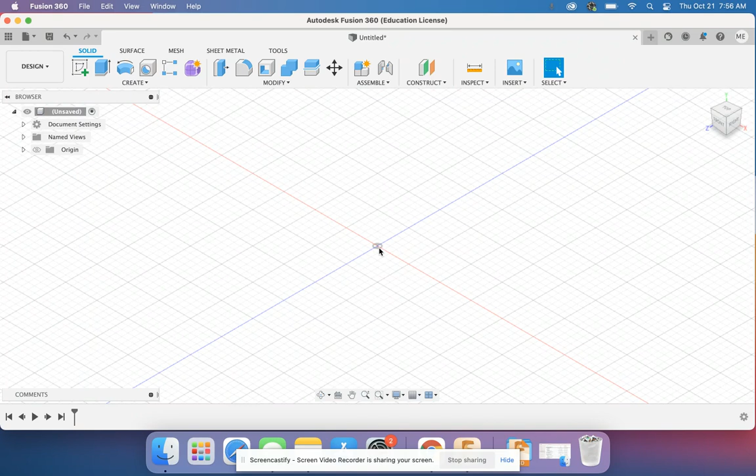Now that we're started, I want to construct the box so that it is around the central origin point. But in order to do that, if I turn on my origin, there's no plane that sits out here so I can revolve something around the origin. So I'm going to need to construct an offset plane.

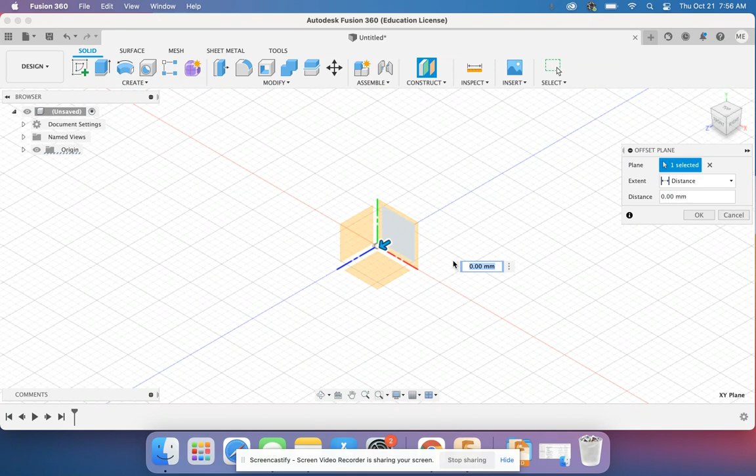I'm going to construct that offset plane from this, and do it as length divided by 2. Now I have a plane that's halfway off of the origin in this direction, so as I revolve, everything will center on the origin. Now I can create a sketch on that plane.

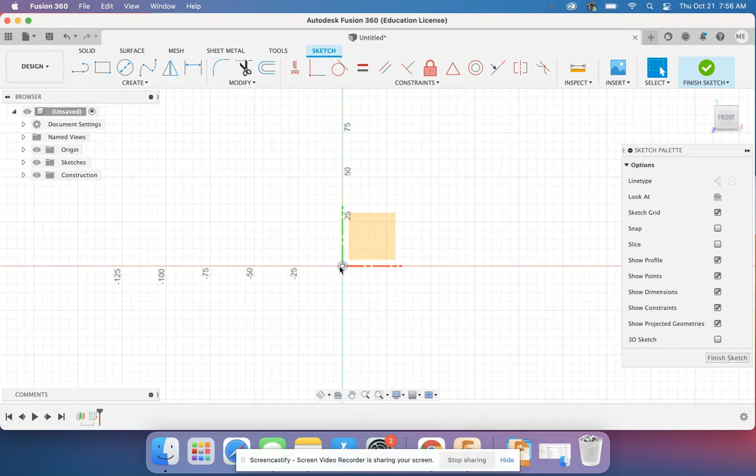My origin here is at the center, and I want to center the box on that origin on this plane, so I'm going to use a center rectangle. This box is going to be length times millimeters, by length.

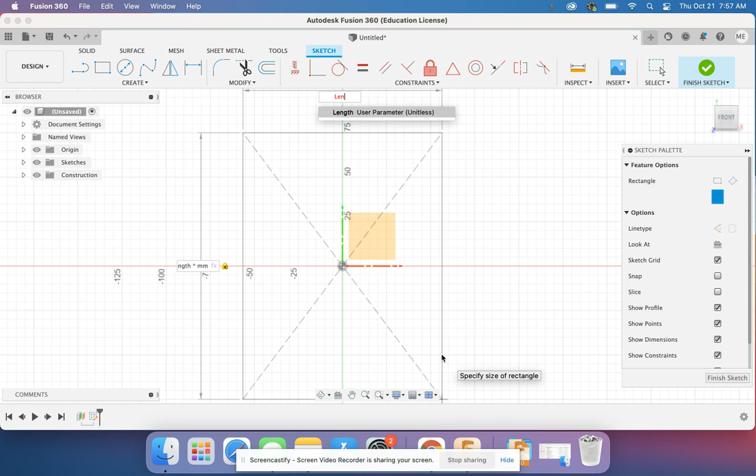So I have the first wall of my box as a sketch, and this is actually the only thing I want to do in this sketch. So I'm going to go ahead and finish my sketch now.

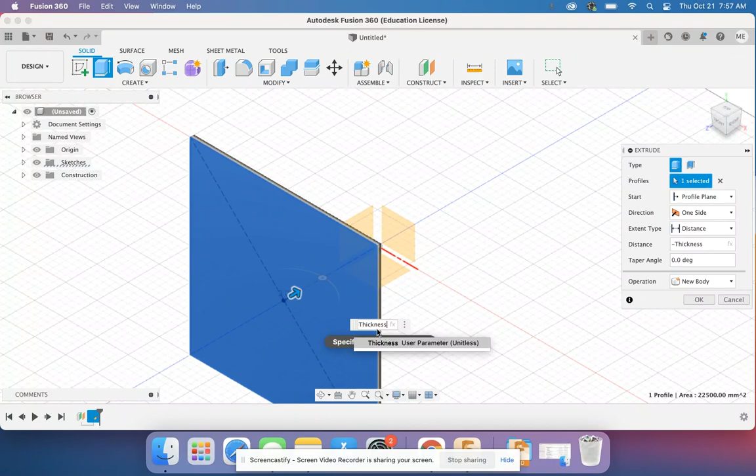I want to extrude my first wall in, and I'm going to do this by negative thickness. I want all of the plates of the box to be pushed inward so that they intersect. So there's my first body.

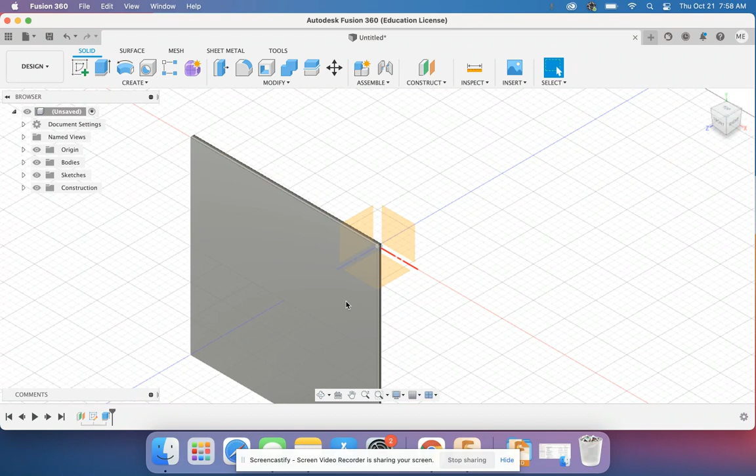But we will be doing quite a few different types of joints, and some of them are more complex and require some ability to move around. So we are going to create a rectangular pattern on this so we can create 3 levels of this wall. This wall will have 3 panels all stacked together.

So I'm going to click the rectangular pattern tool. I'm going to choose bodies, and then select my object. I'm now going to select the direction that I want to go.

To do this, I'm going to orbit slightly. Now I'm going to select the direction, and I want a direction in this fashion. I'm going to make this at negative thickness times 2, so now you can see the 3 panels lined up.

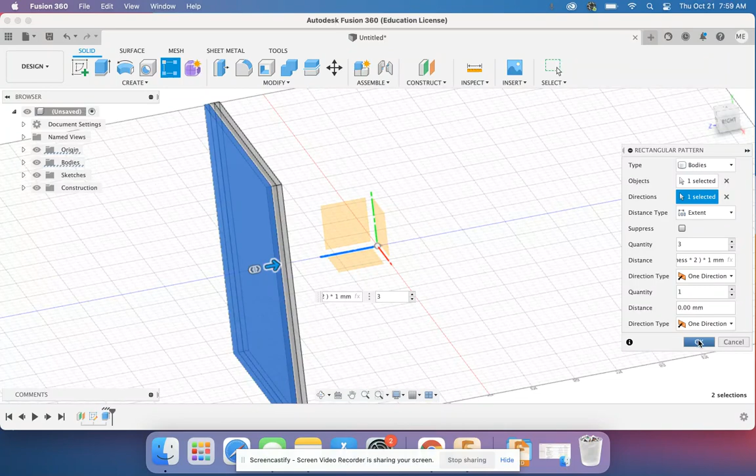Before you click OK, though, we don't want any pattern or repeat in the other direction. So we're going to put 1 there, so it only makes 1, and there's not 6 panels sitting on top of each other, or 9 panels. Instead, we just want 3 stacked panels. So we'll go ahead and hit OK.

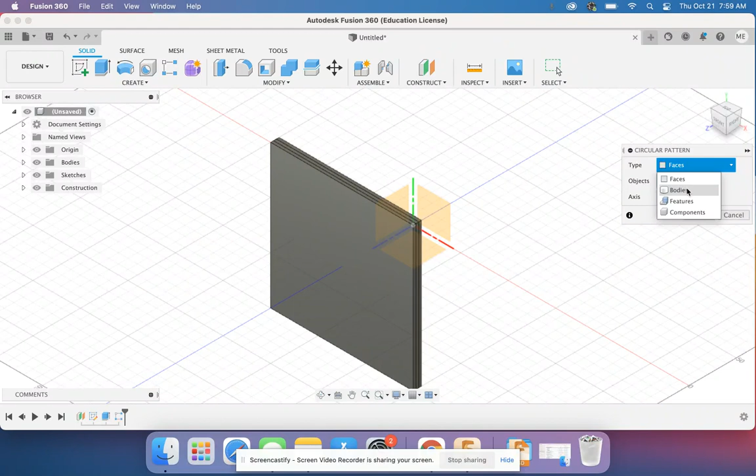And now we have the first panel or side of our box. A cube, or a box, has more than one side, so we can use the pattern tool, the circular pattern tool this time, to take these bodies and rotate them around the center axis.

I'm having a little trouble selecting all the bodies, so I'm going to go into my bodies menu and select them that way. Now the axis we want to rotate them around is the center axis.

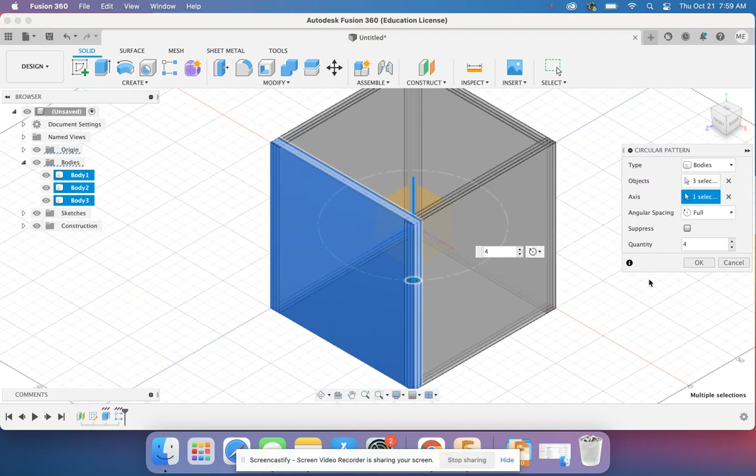Quantity-wise, our box is going to have 4 sides, and that's all we're doing. Okay, so you can see we have 4 sides, but we don't have a top or a bottom.

So we're going to look at 2 tools, one we've used before, one we haven't, to create the top and bottom. First off, I'm going to click on the Move and Copy tool, which allows us to manipulate these bodies, and we can create a copy.

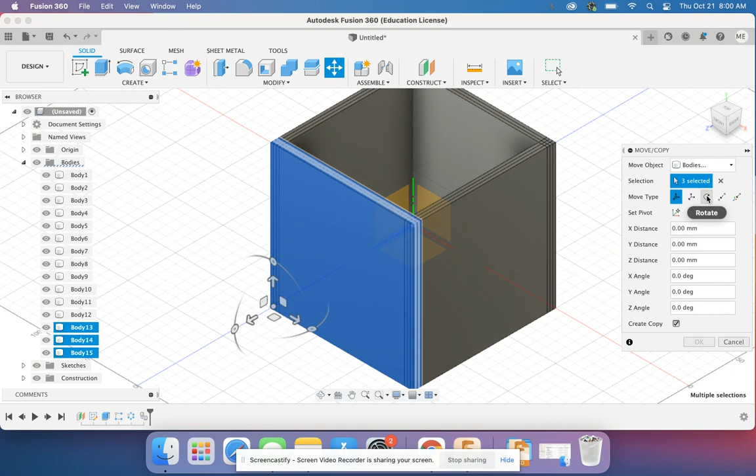So we're going to check that. But we don't want to just move this translationally, we want to actually rotate it so it's at the top. So when I do that, I have to once again click Create Copy.

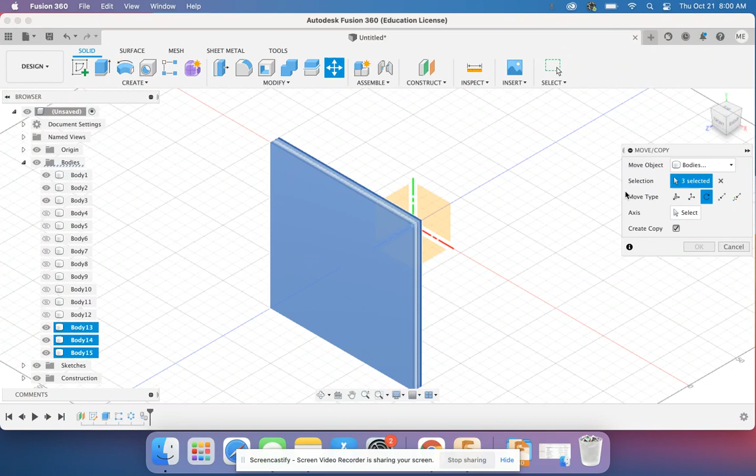A lot of these bodies are kind of in my way, so I'm going to turn them off so I can see the origin better and select the axis I want to rotate around. I want to rotate around this axis, and I'm going to rotate it 90 degrees.

Now I've created the bottom of my box. I can hit OK. Just so I can see this better, let's go ahead and turn those bodies back on. And you can see it lines up perfectly as the bottom of the box.

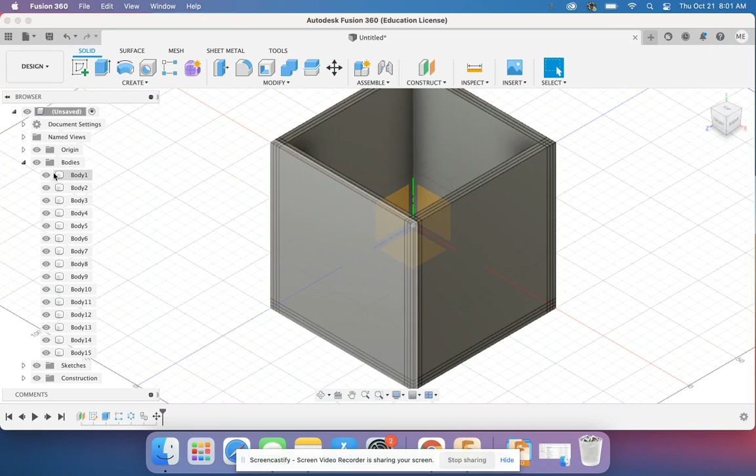So we're going to turn off those front 3 bodies, that way we can see once again inside of our box well. And we are going to select the last 3 bodies now and mirror them.

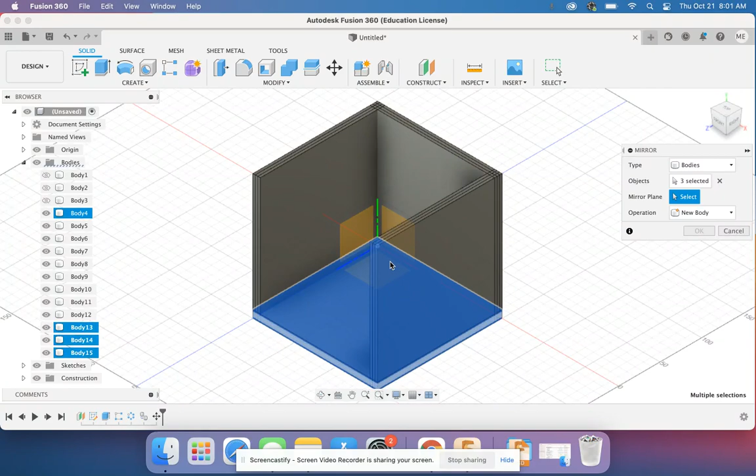So create a mirror, and select these 3 bodies. Then the mirror plane is going to be simply the origin plane that we originally have. So here, this X plane will be what we mirror across.

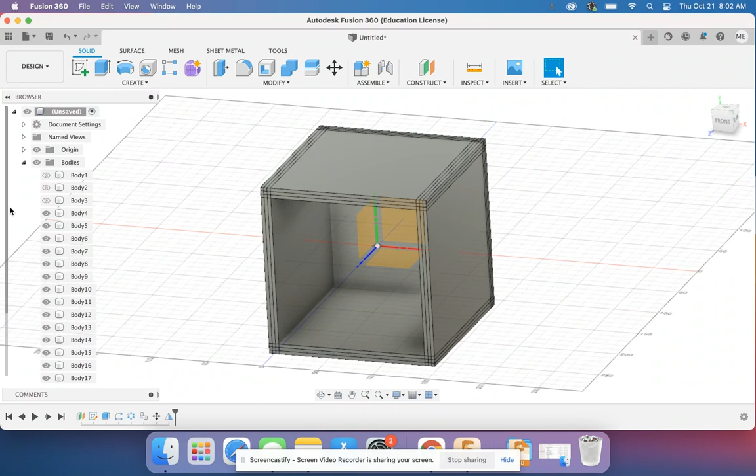Okay, and we're creating new bodies. And now, if we turn it all on, we have a full set cube.

So one more thing before we go. I'm going to take body 1 and make it a component, create components from bodies. That was the front plate. I do it in this fashion because I'm going to go label this as front.

And now I can select other bodies to also move to the front. So I can select this one, drag it down, put it in the front. And lastly, body 3. I do this because if you look, this gets a little bit more confusing, that 4, 5, and 6 are actually on different faces of the body.

Okay, so let's go ahead and take body 4 and create a component. It is on the right side of the box. You can use this as reference up in the top corner. So I'm going to call this one right.

And then I'm going to find all the other right panels and put them in the same component. This way, as we start working, we'll have bodies grouped and be able to work with them. So I'm going to go ahead and do this for all other sides: back, left, top, and bottom.

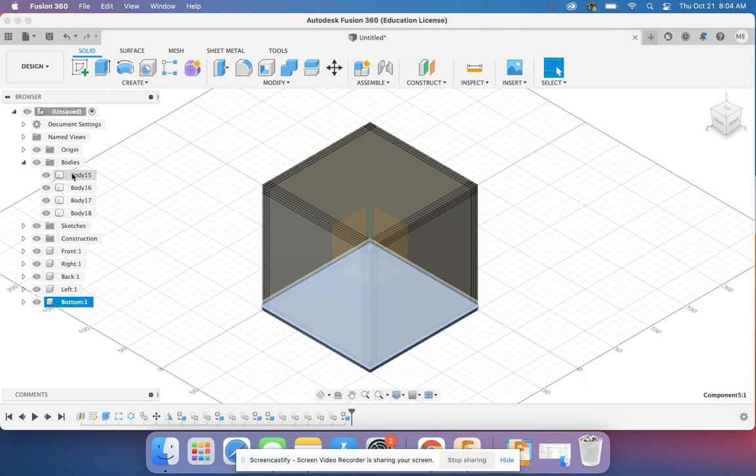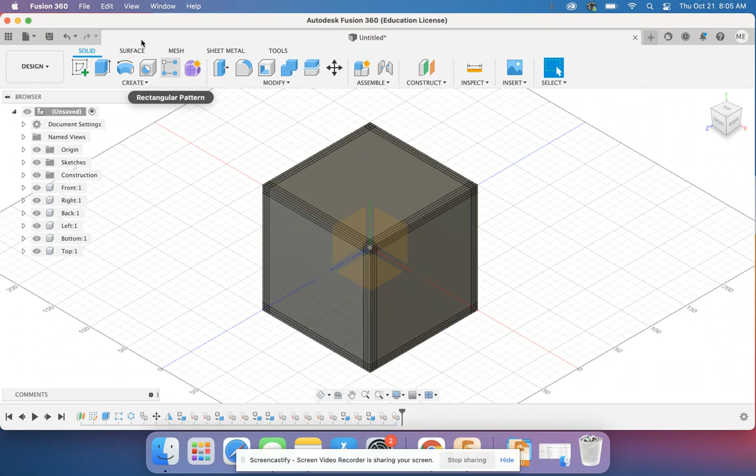Okay, so I now have a complete cube that I can start to work with. I'm going to go ahead and save this, make sure it's saved so that we can continue working with it. And this is where we will pick up next time.